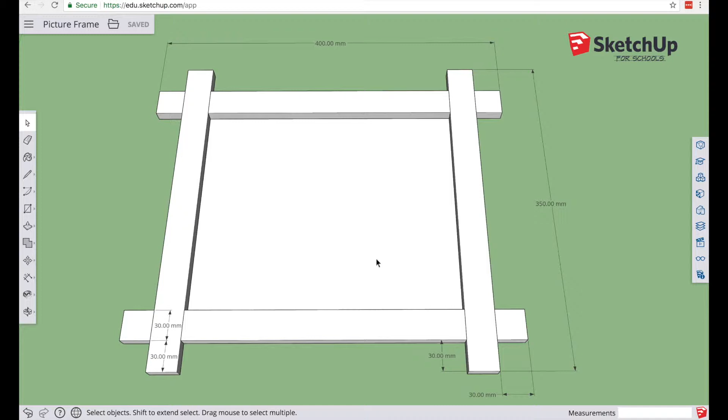So while this may look like a much more complex diagram to create, it's still only a couple of pieces that we need to do. As always, we're going to start with a new model, and we're going to do this in much the same way as we would with a real piece of wood. I'll also demonstrate some ways that we can do this a little bit more quickly.

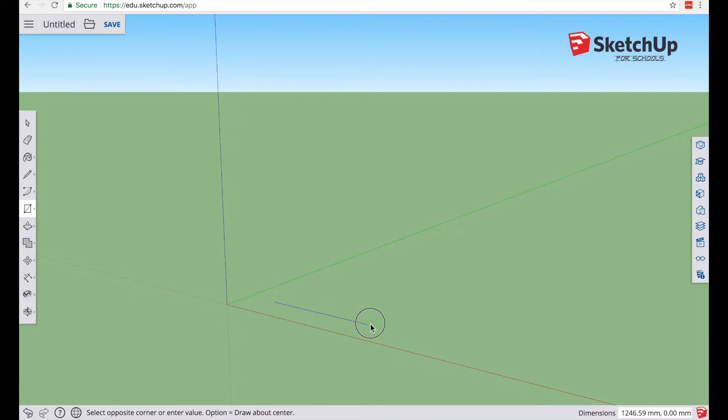I'm going to start by modeling my longer piece, my 400. Much like we've done before, I'm just going to draw an approximate rectangle shape and then fill in my measurements down in the bottom right hand corner. It's going to be 400 by 30 millimeters wide. I'll zoom in with my extents tool, and then with my mouse just scroll out a little bit and rotate for a better view.

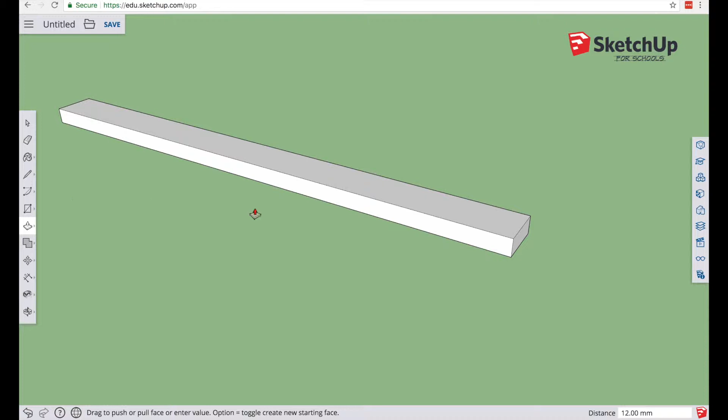Now I'm going to bring that up to the 12 millimeter thickness, and I now have something representing my piece of wood. So the way I would be doing this now in class with a real piece of wood is I'm going to start by measuring 30 millimeters from each end of this, and that will give me the outside measurement for my joint.

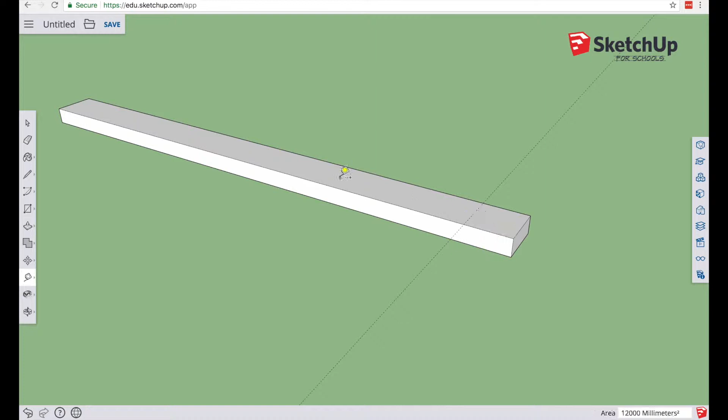In SketchUp, I'll be using my tape measure again to get my construction line. Start from the edge, go across, and I'm going to type my 30 in, and I'll do the same on the other side.

Now what I'm going to do is from this line I've just created, I'm going to measure another 30 millimeters. This 30 millimeters comes because the width of our joint, so the piece that needs to go in there, is 30 millimeters wide. So we need a gap that's 30 millimeters. I'll do the same on this end.

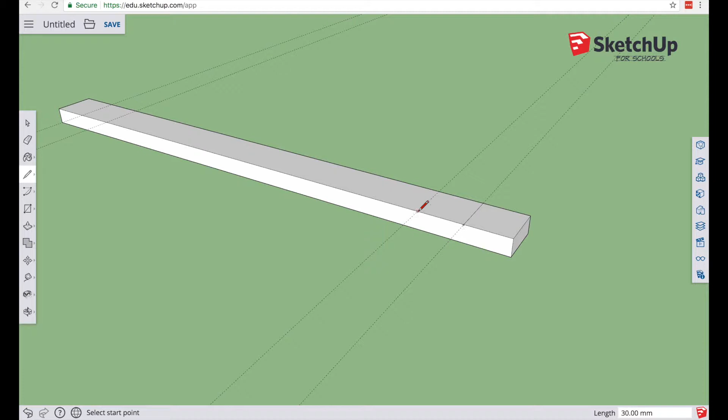And now what I would be doing in the classroom is using my square and my pencil to draw these two lines across. Again, in SketchUp, I'm just going to draw it in now using the locking points on each of those. I might just zoom in a bit here, from there across to there, just like that.

I can rub out my construction lines at this point. Don't need those anymore.

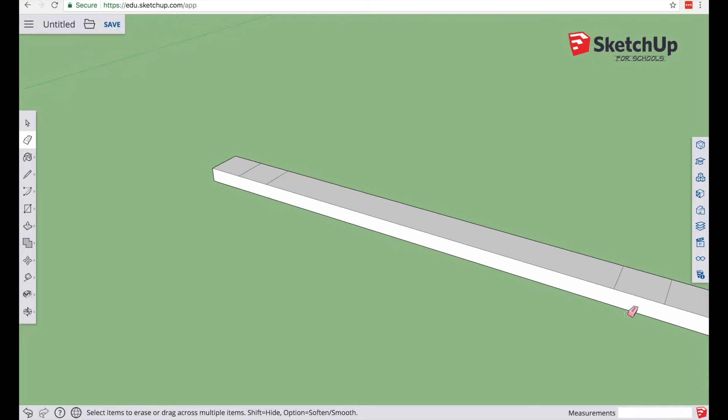Now what I'll be doing is measuring my halfway down. I'm just going to do it on this end down here. I'm going to rotate a little bit more, and I'll be measuring halfway down.

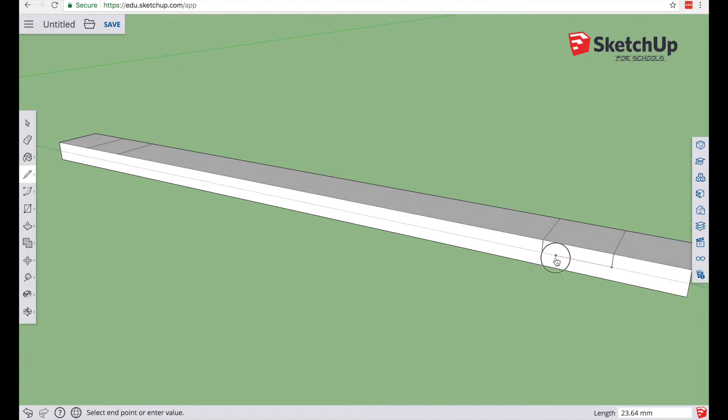So again, I would measure 2 points of 6 millimeters and then join them up, and I will then be drawing my lines down. Of course, I'll do that on both sides, so I have these lines coming straight down, and I'll be joining that up as well, and I'll do the same on the other side.

I'll then be cutting my relief cuts in this waste area down to this line I've just drawn, and then I'll be chiseling this out.

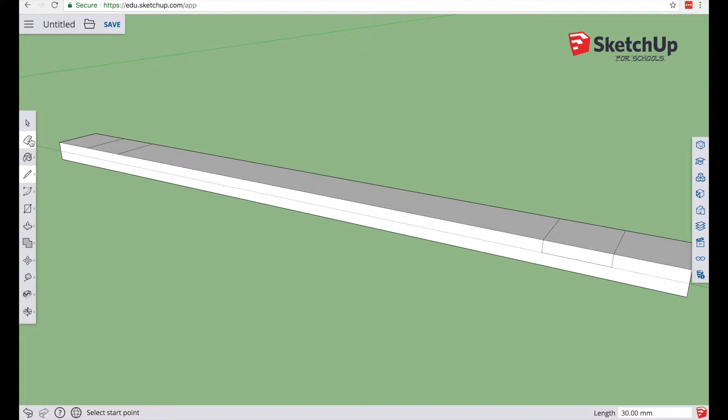Of course, in SketchUp, we can do it much more efficiently, so we don't need to draw those lines. I'm just going to quickly remove those lines that I drew and the construction line, and I can simply push that down at this point because it's a separate shape - down by 6 millimeters and down by 6 millimeters. So we should end up with a piece that looks like that.

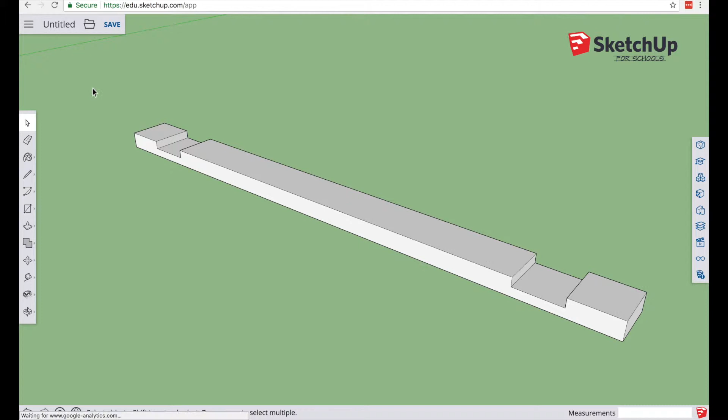As we usually do, let's make that into a group now so that we can easily manipulate it later. Okay, so that's our longer piece.

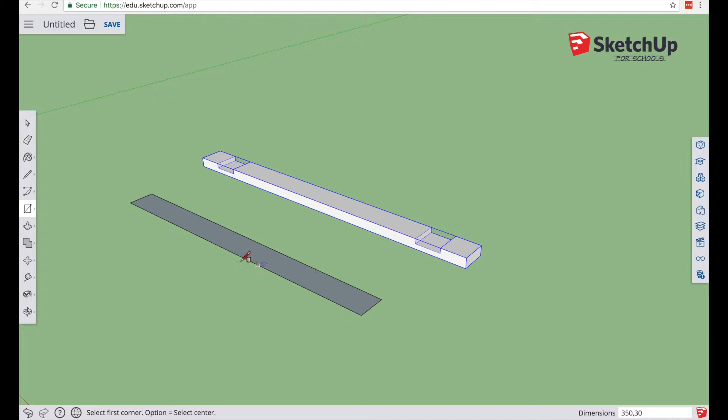Now our shorter piece was very, very similar, and we would go about it in much the same way. We're going to draw roughly the shape we need, and this one was 350 millimeters long by 30 millimeters wide, so just a little bit shorter. Again, we will pull that up to our 12mm thickness.

Now I'm going to show you a slightly quicker way to do this. We start off very similar - we're going to take our tape measure, and we're still going to do our 30mm from each end.

We do need to get that measurement for us. But instead of drawing another 30mm each time, I'm going to use the rectangle tool again, and simply go from one of the intersections. I'll just zoom in to make it really clear.

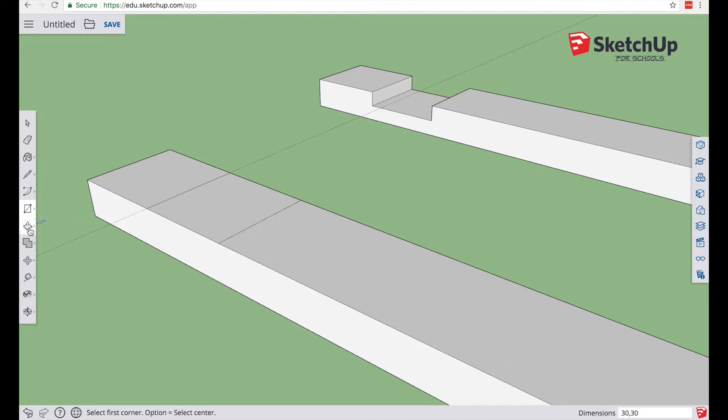So from one of the intersections of that line across the other side, I'm creating a 30 by 30 square here. It's 30mm wide because that's the gap we're creating, and 30mm across because that's the width of the wood anyway. So I'll type 30 by 30, and we can see that there, and I'll push that down by 6. It's just another way of doing it.

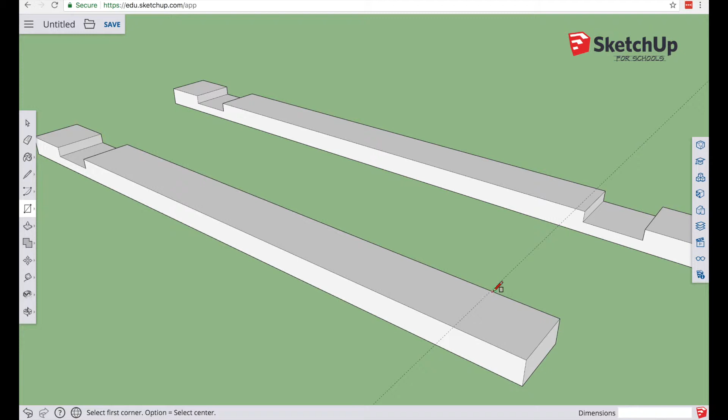Again, it's always good to look at different ways to achieve the same result, and I can rub out that construction line up here. Now I haven't done the other end, so quickly jump in here and do it the same way again with my rectangle tool from that intersection across the other side, type the actual measurements in, push that down as well by the 6, and remove my construction line.

And again, I'm going to make a group. It doesn't matter that I'm covering some of the original one because I'm not covering the whole group. As you can see, that was selected, but this wasn't because the whole part of it wasn't chosen. So I'm going to make that into a group.

At this point, we have the pieces that we need. Of course, the frame has 2 of each of those, so I'm simply going to duplicate them. I'm going to copy that and then paste that in.

I'll just stick one of them over there for a second. So these are going to be my 2 pieces in that direction. But before I copy this one, hopefully we realize we actually have to flip it over and rotate it by 90 degrees. So let's do that again.

So we're going to use our rotation tool, in this menu here. We need to do the 2 options, and it doesn't matter which way you go. I'm going to rotate it around first and then.

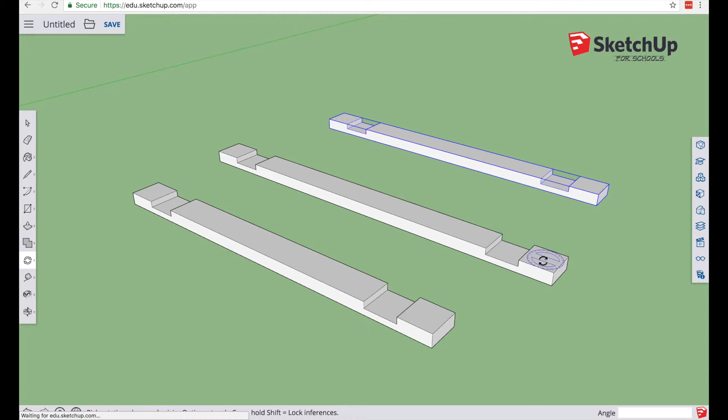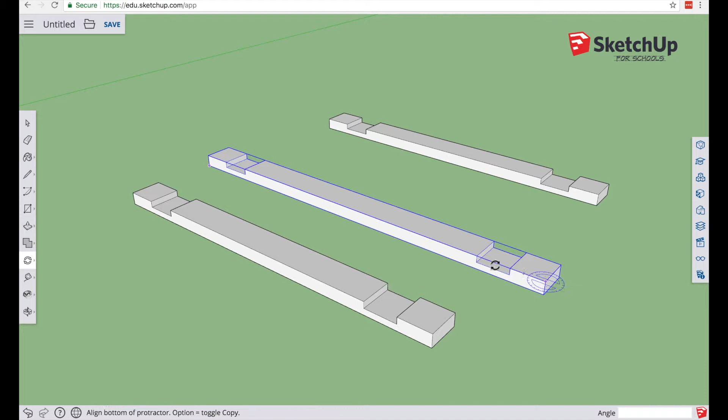First thing I'm going to do is make sure I've selected the right piece, the piece I'm going to rotate. I'm going to grab my rotation tool from over here, and it doesn't matter which order you do it, but I'll do the rotation first. Sorry, that was the moving tool, rotation tool. So I'm going to do the rotation this way first, and then I'll flip it over.

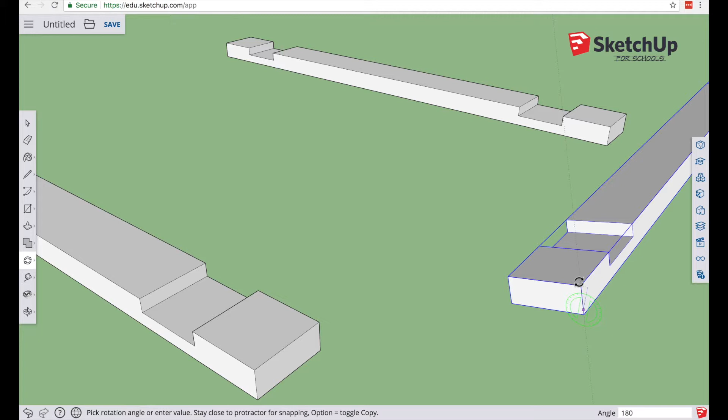So I need a 90-degree rotation. There we go. Zooming in to make it a bit easier to see, I'm going to now rotate it around this axis. This time it's 180 degrees to give it a complete flip. If I zoom out, we can see I've got it flipped around the way I want.

So I'm going to quickly just move it into a more appropriate location for a second, just roughly there. Now I'm going to duplicate that one, copy and paste it in, and paste one approximately here. So I've got them in roughly the location, 2 pieces and 2 pieces.

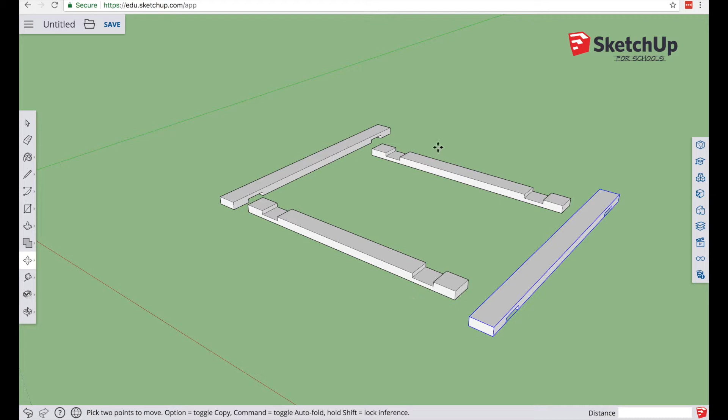And now I just need to use my move tool, and again, taking advantage of the fact that everything wants to lock into place. Helps if I have the right one chosen. There we go, taking advantage of the move tool and the fact that everything does want to lock into place, I can quickly move these into the right locations.

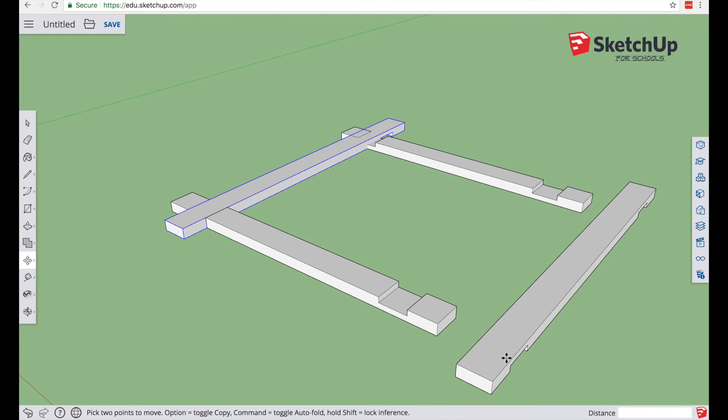So moving and rotating, making sure you choose your pieces each time before you try and move it. You don't want to accidentally move the wrong piece, but just locking everything into place. You can't quite see, so moving closer so you can actually see where you're locking. There we go, and the last one, we'll just rotate around a piece and take that one.

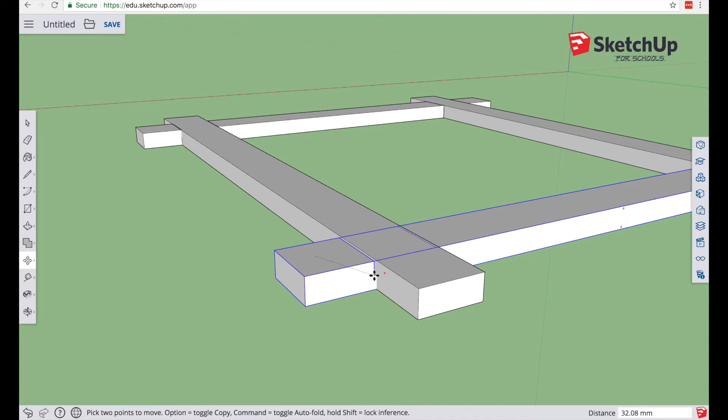And finally rotate, sorry, not rotate, move that one, lock it into there. There we go, so we now have our frame with our crosslap joints joined in properly. Now, hopefully those of you paying attention will realize we're missing one more piece that we haven't spoken about, and that is actually the backing piece.

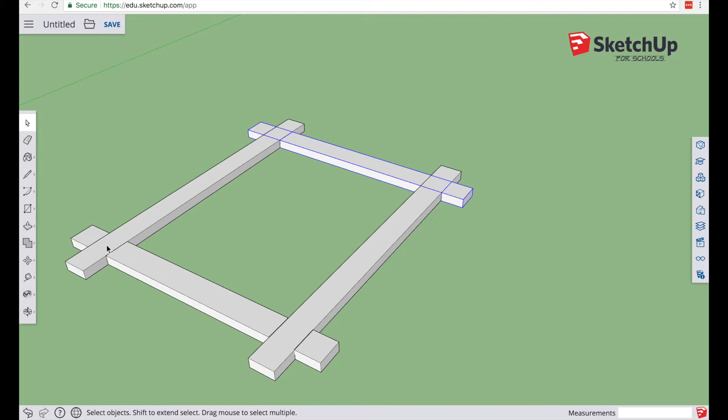So what we're going to do here is actually just flip this right over, spin it around so I can see it on the back, and we're going to have to create a piece that goes in here.

Now, when you're given the real piece, it's going to be a bit bigger than what you need, so we're going to need to trim it down. What we're going to do here is model what would be ideal, and essentially we want a piece that comes in halfway from these edges, all the way around, and that's where our backing piece will sit.

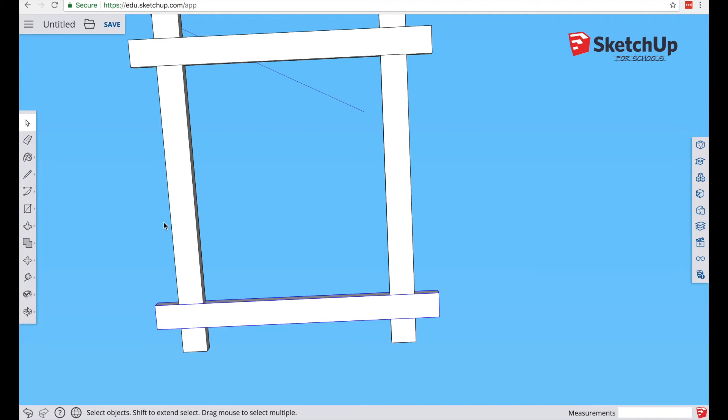The only real way to do that at this point is to take our tape measure and come in halfway, giving ourselves some guidance, remembering that these are 30 millimeters wide, so we'll make it 15 to get the half, and we just need to bring these in on all four sides.

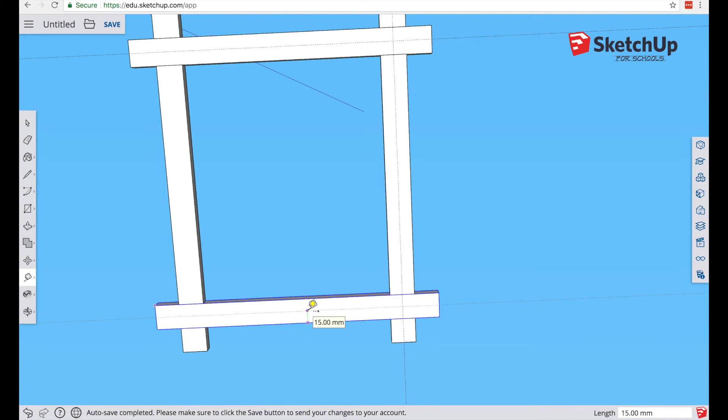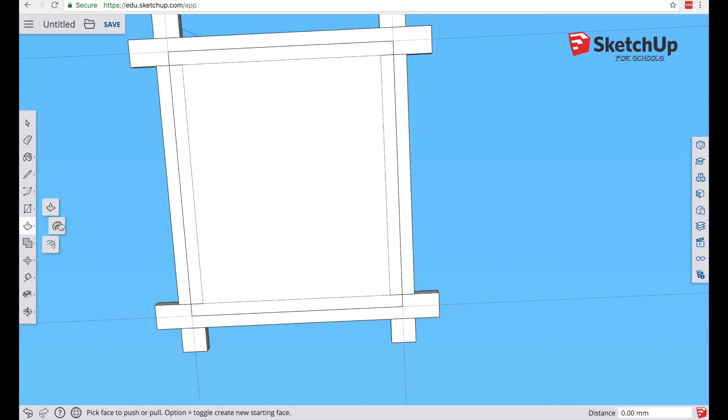Now I could have worked out the measurement, drawn up a piece and then positioned it in the right place, but again, because everything else is measured correctly, I can put these guides in and then very easily take my rectangle tool and take it from one corner point to the other and create the piece that's the actual size I need. And now I'm going to grab the push-pull, drag it out, and this is only a 3 millimeter thickness.

This is the piece of plywood on the back. You'll have used that before. So it's 3 millimeters, press enter, and if I rotate around, I can just see how that's got a very slight thickness there. Now I do want to turn that into a group.

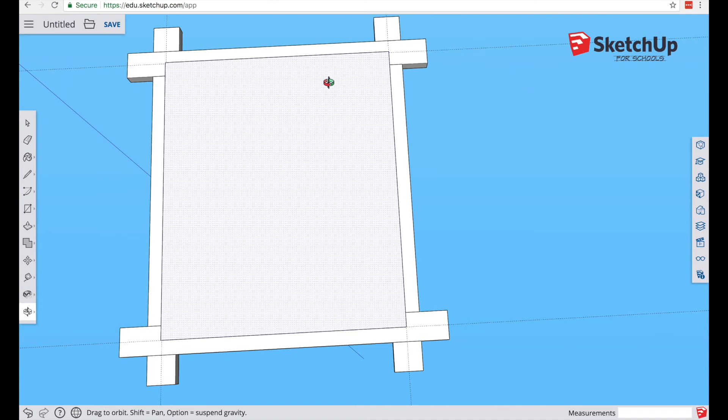And I could do it in a few ways, but what I'm going to actually do is first get rid of the construction lines, and then quickly hide the rest of this.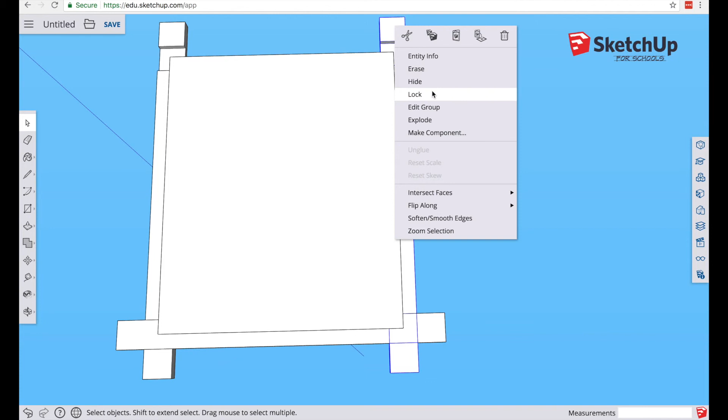We may have seen that in a previous video, but if I choose any of these groups, I can right click and hide them. I just have to do them one by one very quickly. So I've just hidden them, and that means I can work with just this piece safely.

So I'm just going to select the whole area and turn that into a group, and I haven't had to worry about whether the other parts are chosen because they were hidden.

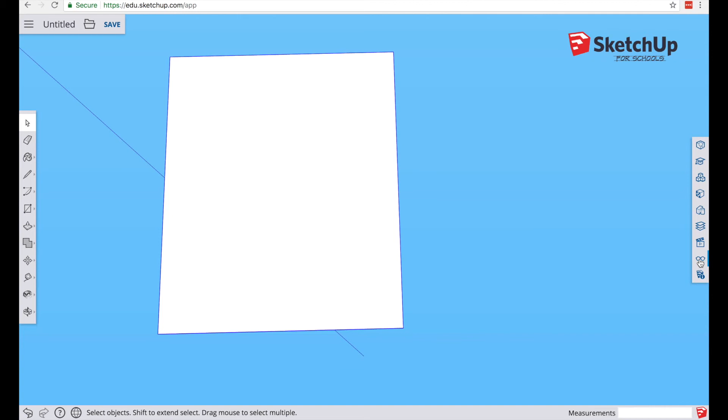So again, we're going to come over to our little glasses on the right hand side, choose that, and in our hide or unhide area, I'm just going to say unhide all to bring everything back. So now I've got everything in their own individual groups again, so it's very easy to change and do things too.

The benefit here now is we've actually drawn in this piece without actually knowing the size because we did everything else correct. We had all the other pieces measured correctly, we measured in from the edges. But what we can do now is take our tape measure to find out what this should actually be.

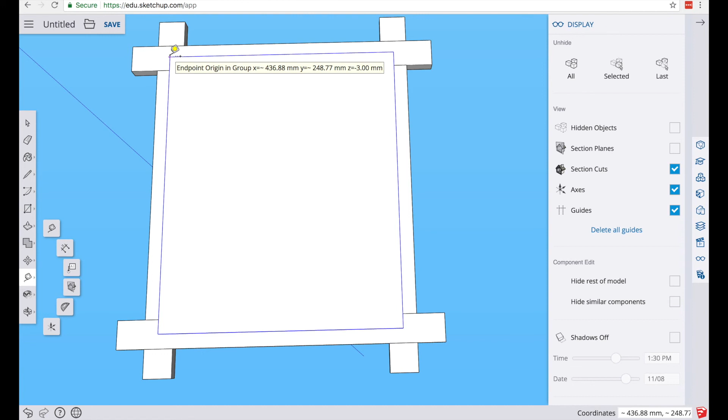So if I do that, I can see that the measurement is 260.41 approximately. Or another way I could do that, a tool that we maybe haven't talked about but you've seen, is using my dimensions tool.

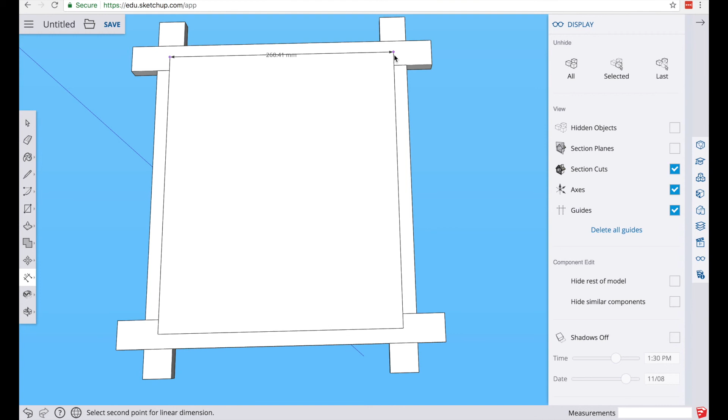That's what you've seen me use at the start of these videos when I'm showing you what the sizes are. So if I simply click on any two points like that and then pull it around, I can see my measurement. So we've got the same measurement, 260.41.

And again, down this way, that measurement comes out at 309.92. So there's obviously a little mistake here because we shouldn't be getting a point value. So I must have accidentally made something ever so slightly the wrong size. But here we go, we can see that we've made a mistake.

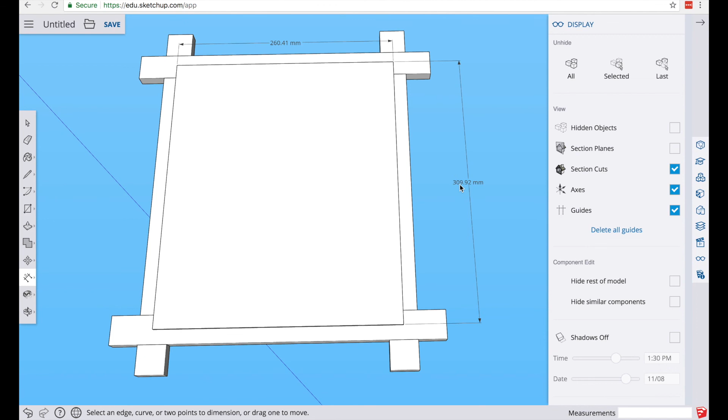And of course, I could go back and fix this up, but for the purposes of this video, I'll leave it as it is. You can hopefully do that a little bit better than I've done and get your measurements exactly right. But if we got this exactly right, we would be able to take these measurements and know what to cut in the real world to make sure we got this exact piece.

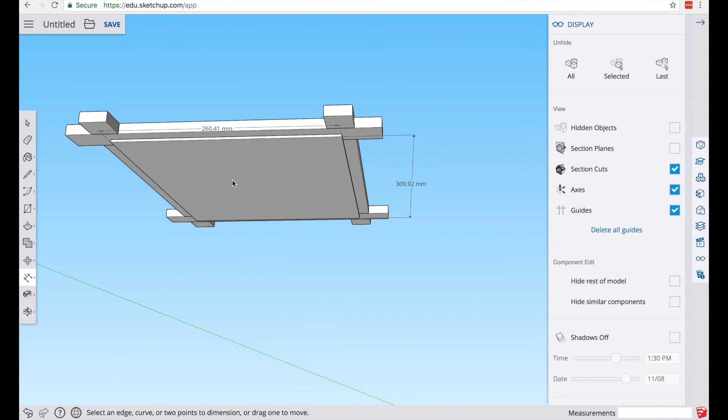So I probably typed in a value just slightly short, maybe a decimal point wrong. But again, I think for the purposes of this video, it's sufficient and you'll be able to see what you need to do. Okay, hopefully that's making sense for you.

You can go off and model that for yourself. Don't forget to color it and maybe even show a design in the middle if you'd like to, and then have that ready to hand in on time.